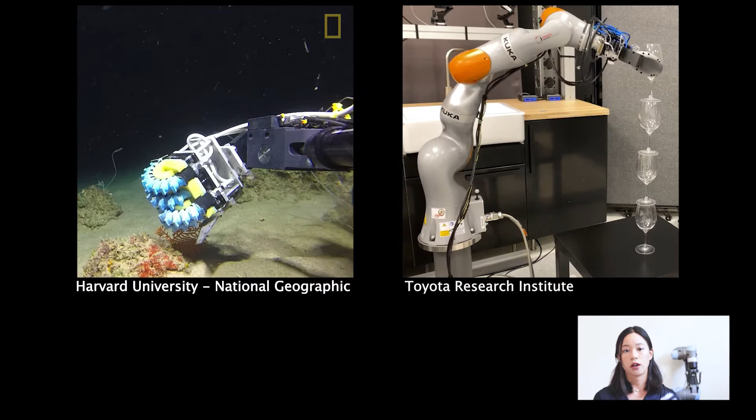Soft robotic end effectors are useful for interacting with delicate objects like coral reefs and wine glasses due to their low intrinsic stiffness and mass.

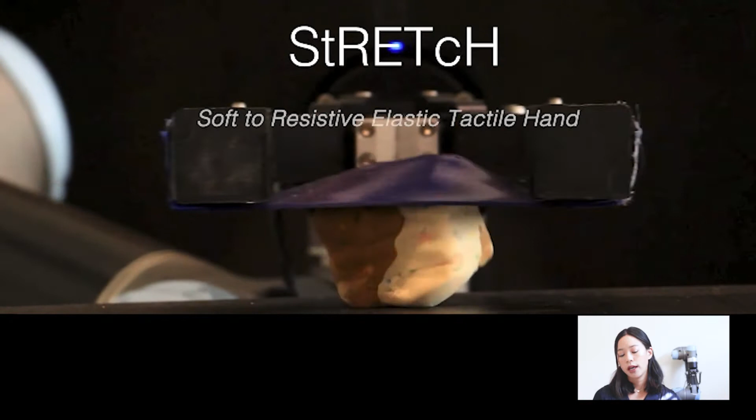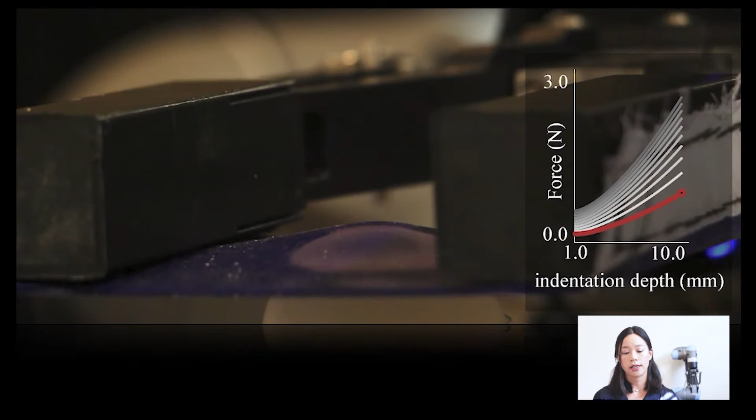In our prior work, we designed a variable stiffness soft end effector called Stretch, which enabled new robotic manipulation capabilities with deformable solid objects. Its compliance was crucial for handling soft elasto-plastic objects like dough without permanently deforming or flattening them, while its ability to controllably vary in stiffness allowed it to estimate a proxy for object stiffness as well as modulate the force it exerted on the object.

In that work, we demonstrated that this new end effector design could be used to roll a block of Play-Doh into a sphere. However, the algorithm used to roll the dough was heuristic, in that the robot just applied the same rolling action to the dough until the goal condition was met.

Because this was a simple heuristic algorithm, completing the task sometimes took a long time, even on the order of 20 minutes. But when we compared this with human examples of dough manipulation, we knew that this problem should be solved more efficiently. And this is exactly what this work set out to accomplish.

We set our goal to efficiently roll a ball of dough into logs of varying lengths. To the best of our knowledge, this is the first work to propose a solution using a soft end effector to shape servo a deformable elasto-plastic object.

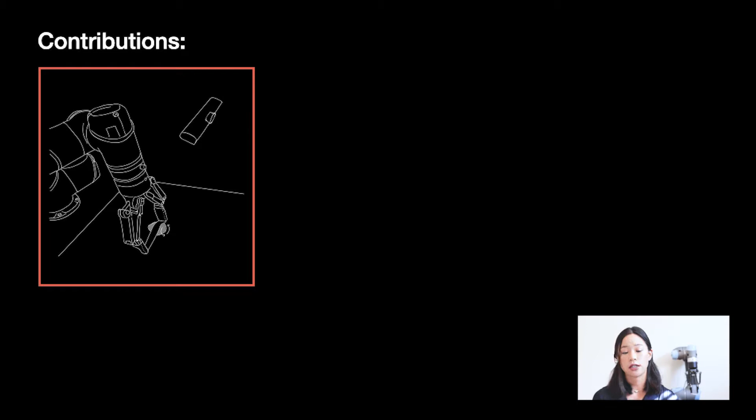Our main contributions are thus as follows. We designed a novel elastic end effector attachment that is cost-effective and easy to integrate with a parallel jaw gripper. The elastic end effector is also used to estimate the stiffness of different dough, which improves rolling performance.

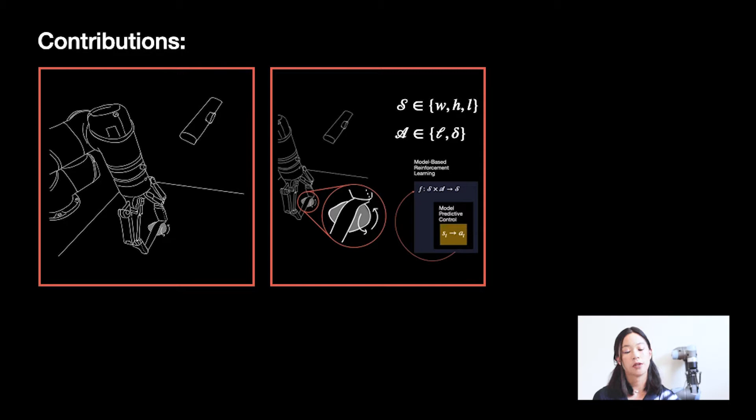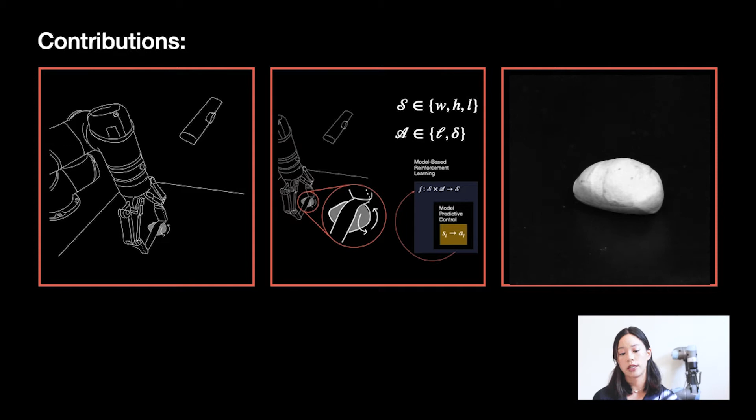We also presented an algorithm leveraging model-based reinforcement learning and simple featureization and actions that enable tractable optimization for real-time solid deformable object manipulation. And lastly, a series of robotic experiments rolling dough of different hydration levels into varying lengths serve to quantify and demonstrate the efficacy of the proposed hardware and software framework.

In this work, we revised the design of the original Stretch end effector to compensate for kinematic limits required of the dough rolling task. We made the entire end effector attachment out of elastic bands, and as you see here, it's much slimmer than the prior version. The depth camera was also fixed at an overhead position instead of being rigidly attached to the robot arm.

Notice that this task requires the interaction of a deformable end effector with a deformable object, so this involves highly complex and high-dimensional dynamics that are difficult to model.

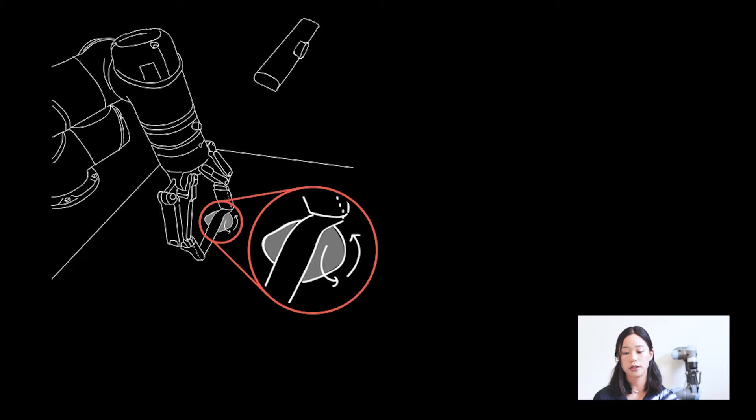So instead of explicitly representing the dough-to-hand interactions, we use model-based reinforcement learning to learn a transition function for these interactions, meaning we learn from data the relationship of, given an action applied to the dough and its current state, what will the dough state be after that action is applied? So this model is represented by F.

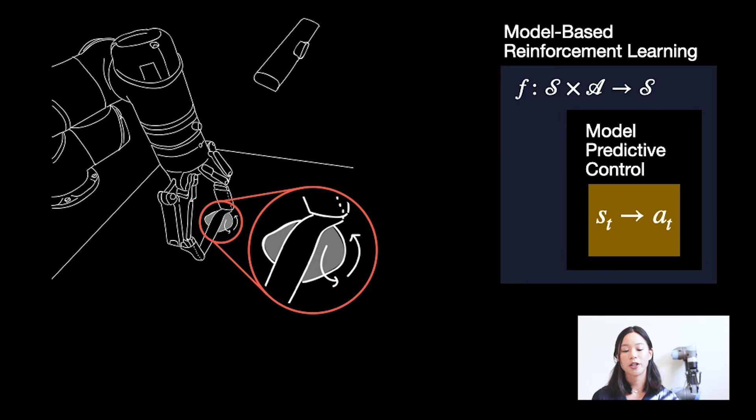Now within this framework, we use model predictive control to select the best action to take at this time step given the current state of the dough. This is done by optimizing the cumulative expected reward over a certain number of time steps into the future. So we're looking ahead where at each time step, reward is calculated as simply, in this case, how close is the dough to the goal's shape?

And what the reinforcement learning framework adds to model predictive control is that it allows us to iteratively update or improve the transition model F to better reflect the dynamics of the dough and hand interactions. This means that if we start off with the wrong model or a poorly initialized model, then the algorithm can still self-correct. Now, one might wonder at this point, how does the robot deal with such high-dimensional data since these interactions are highly complex?

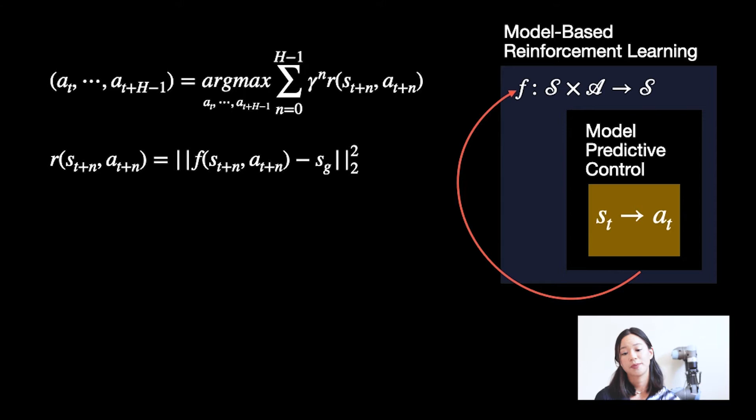Well, with some intentional engineering, we can simplify the problem to make it a lot more tractable. In our case, to simplify the state space of the dough, we took the dough formation's bounding box and used those dimensions to track the dough's shape progression over time.

As for what actions to apply to the dough, the two things we decided to vary were the stiffness of the hand's elastic membrane, which we could vary by opening or closing the gripper, as well as the depth at which the robot pressed the dough.

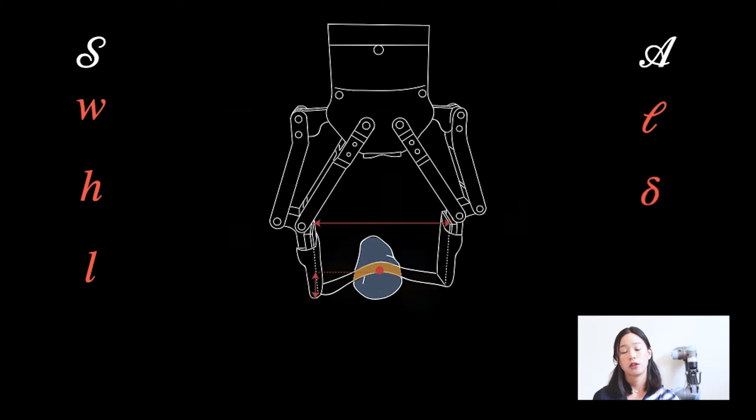These two parameters directly affect the load force imposed by the elastic hand. The rest of the robotic action was fixed in that each roll consisted of a back and forth motion at the highest point of the dough formation.

Given all these simplifications, we were able to train a dynamics model of these interactions with only about 1 hour of robot time, where the robot randomly interacted with a ball of dough under these action constraints.

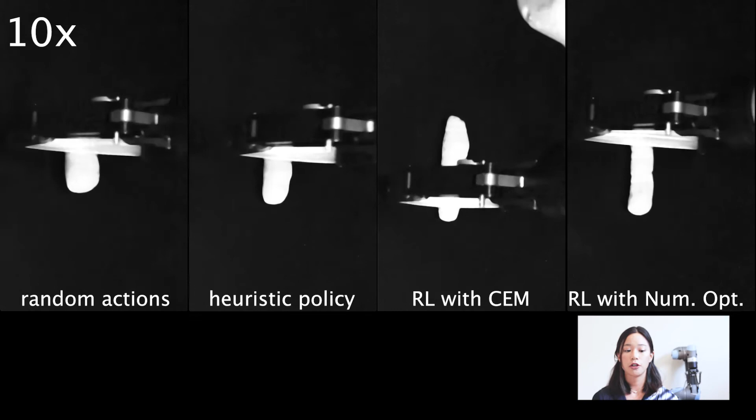For our first experiment, we compared model-based reinforcement learning using iterative random shooting with refinement, along with simple direct numerical optimization of our objective function, against a random action selection policy as well as a heuristic baseline policy. Each action selection algorithm was subject to the same action constraints defined earlier.

We can see here that comparing the reinforcement learning methods with the random and heuristic policies, the robot was able to roll the dough out into the 6-inch log with significantly fewer rolls.

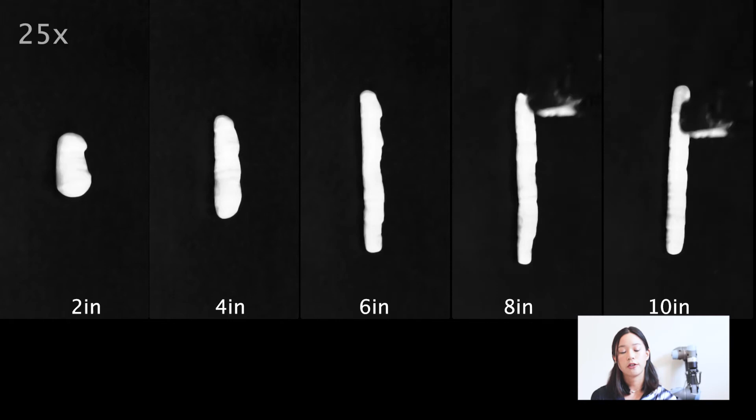Using model-based reinforcement learning with numerical optimization, the robot also demonstrated efficiently rolling the dough into different lengths, ranging from 2 to 10 inches.

However, what happens if the dough that is being manipulated now isn't the same dough as the one that was used for training? So maybe it could be drier, which would cause it to be less malleable and stiffer. This is actually a very realistic scenario since the material properties of dough can change quite quickly.

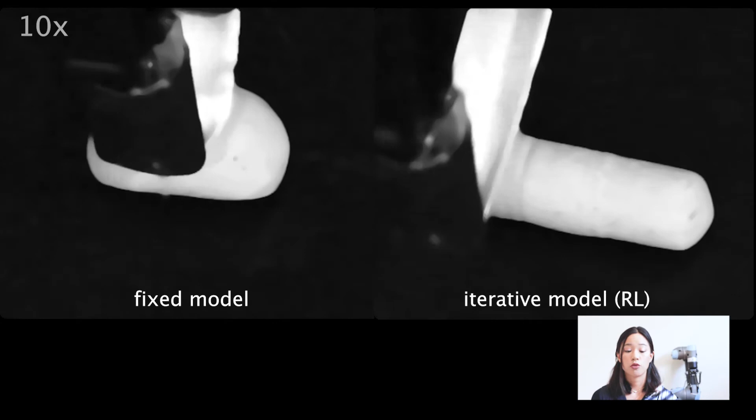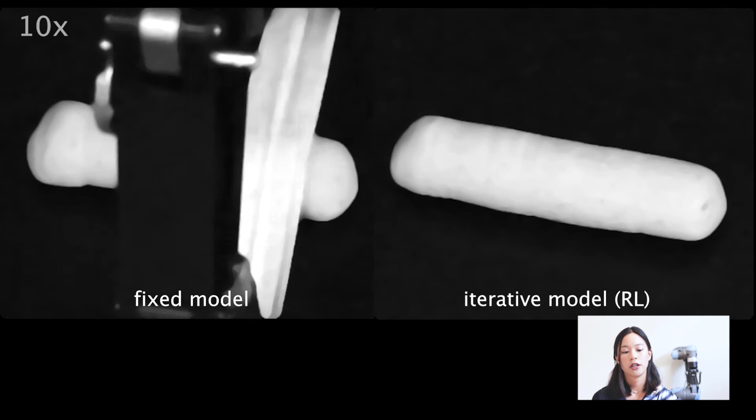Because this model-based reinforcement learning framework allows the robot to iteratively improve the dynamics model given new observations as the robot interacts with the dough in real time, we show in our second experiment that it's able to self-correct and efficiently roll out a stiffer dough much faster compared to when using a fixed model with just model predictive control.

We concluded our experiments by revisiting an idea from our prior work, which was using the stretch end effector to estimate a proxy for the stiffness of deformable solid objects.

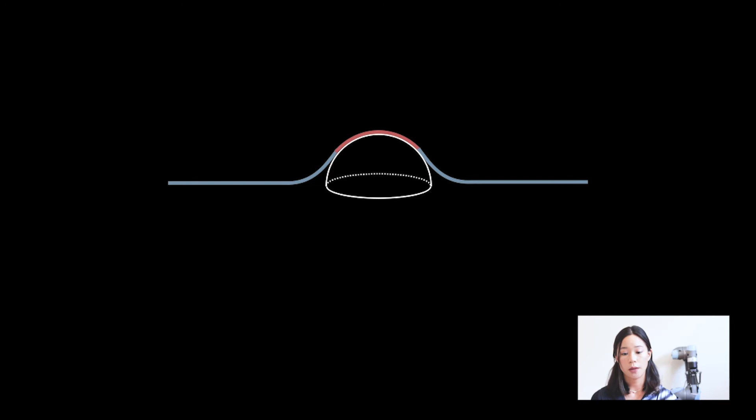So this proxy value for stiffness is estimated via active palpation, where the estimated load force of the elastic membrane is divided by the detected amount of deflection experienced by the object upon contact.

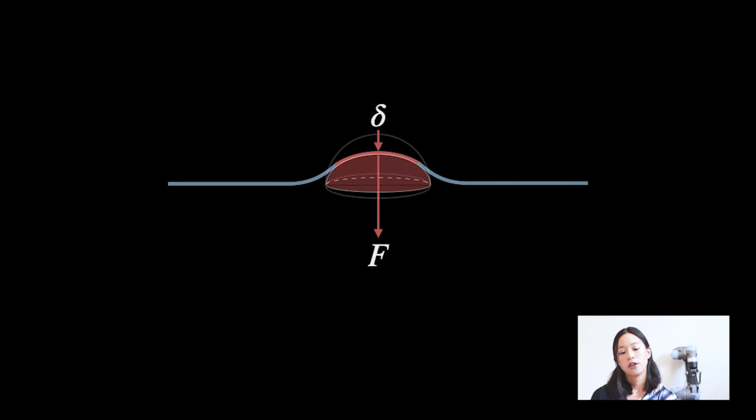So for this work, we wanted to use these estimates to calibrate a model for dough-to-hand interactions to improve the efficiency of the dough rolling task.

By using stiffness measurements to interpolate between predictions from two different models, which were pre-trained on a stiff dough and a soft dough, we showed that stiffness estimates do indeed help the robot regress to a better dynamics model for the dough interactions, and this leads to significantly more efficient rollouts.

If the robot sensed that the dough was soft, it would use a different rolling technique than if it sensed that the dough was stiff. For instance, for a hard dough, the robot chose to apply actions that corresponded with higher force output.

In comparison, for the softer dough, the robot chose to initially apply low force to the ball until it formed into a short log, and then it gradually increased the membrane stiffness to finish rolling the ball out into a longer log.

So to summarize, this is the first work, to the best of our knowledge, that performs deformable manipulation using a soft end effector on elasto-plastic dough.

We present a novel end effector that is not only cost-effective and easy to integrate with a parallel jaw gripper, but it's also able to vary in stiffness, allowing it to effectively manipulate soft deformable objects like dough.

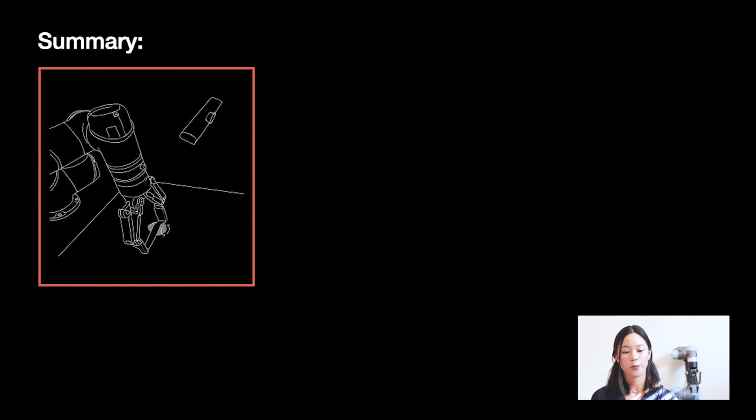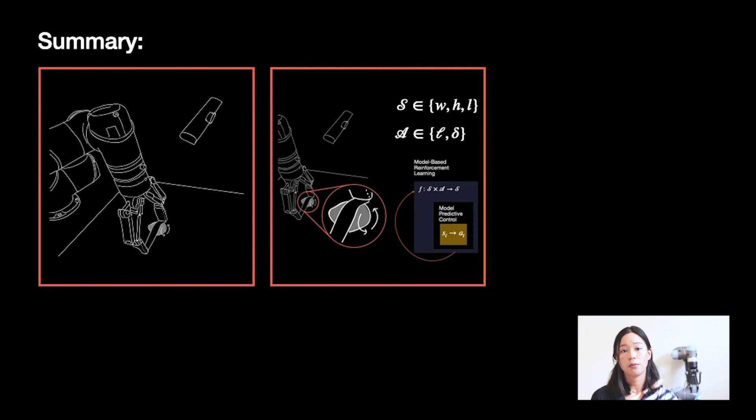We then leveraged a model-based reinforcement learning framework to roll dough into different lengths, where simple featurization and actions enabled tractable real-time optimization. Real robot experiments demonstrated high efficacy of the proposed system, where the proposed action selection method exceeded the heuristic method in efficiency.

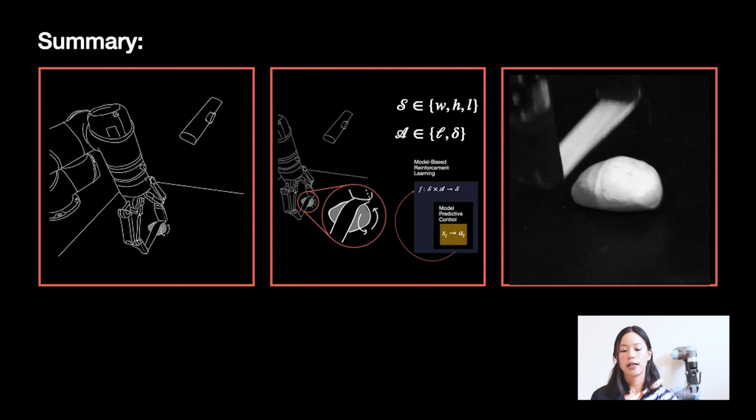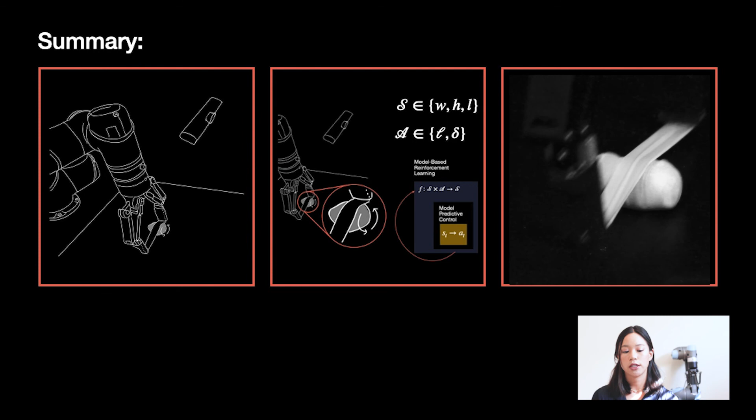The proposed action selection method exceeded the heuristic method by more than 60% in efficiency, and stiffness estimation enabled better model initialization, which consequently improved the robot's performance by approximately 40%.

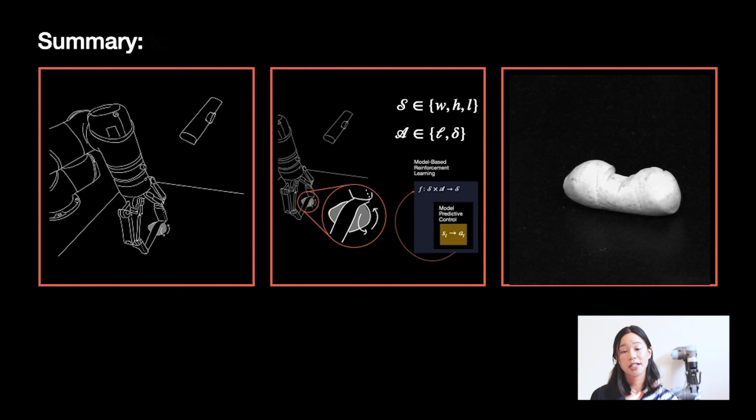We hope these experimental results can inspire more work in the area of deformable solid object manipulation. We're interested in exploring, via future work, new low-dimensional parametrizations of dough, and to experimentally compare more dough-to-hand dynamic model representations.

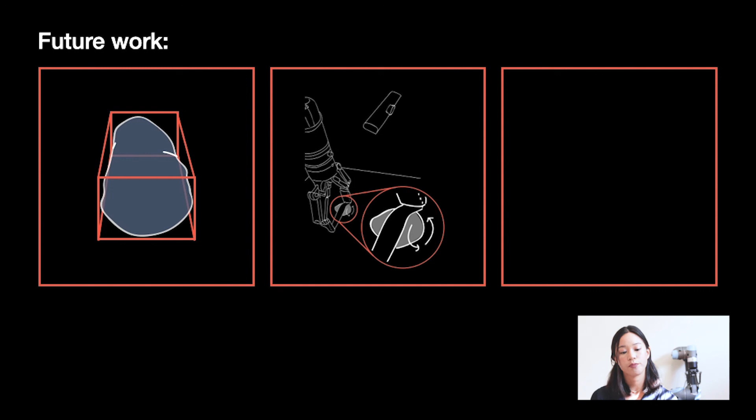Ultimately, we hope this technology can be used to manipulate real dough into more complex shapes, such as pretzels. Thank you for your interest in our work, and please see our paper for more details.